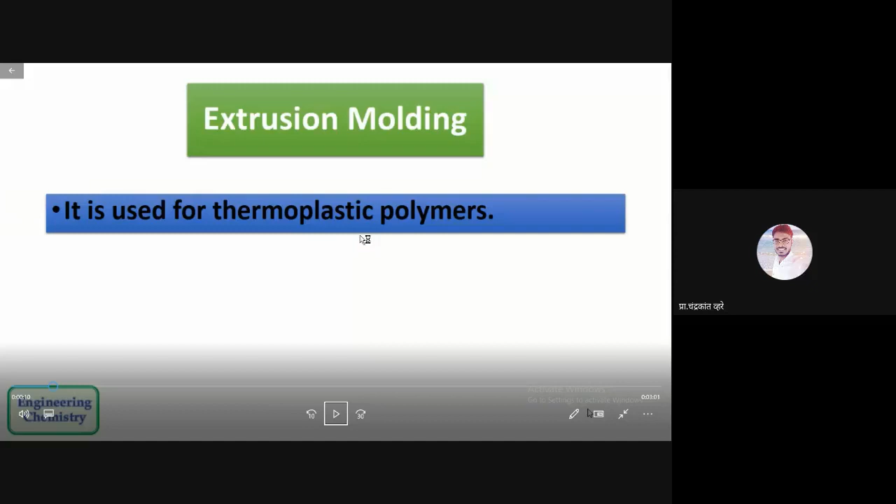Okay, so majorly it is used for thermoplastic polymers. We know there are two types of polymers: one is thermosets and the other is thermoplastic. So we are using it for thermoplastic polymers.

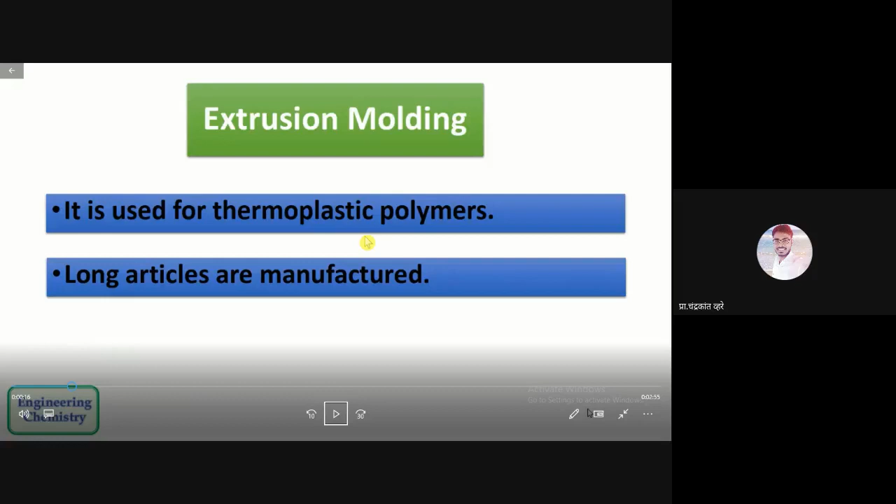Long articles are manufactured, meaning long products like long wire. Maximum time extrusion molding is used for long type products. Sometimes we use it for insulating purposes, and sometimes for long hollow pipes or other hollow products, but they must be in long size. In short size, it is not possible to manufacture.

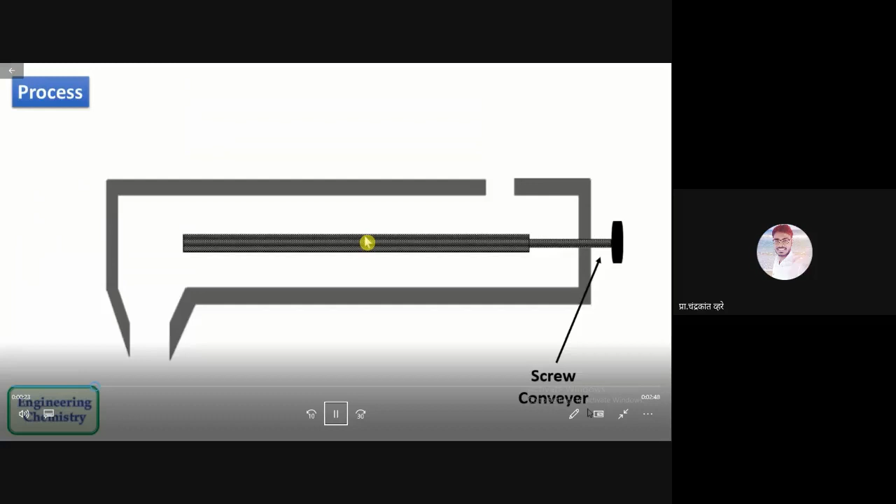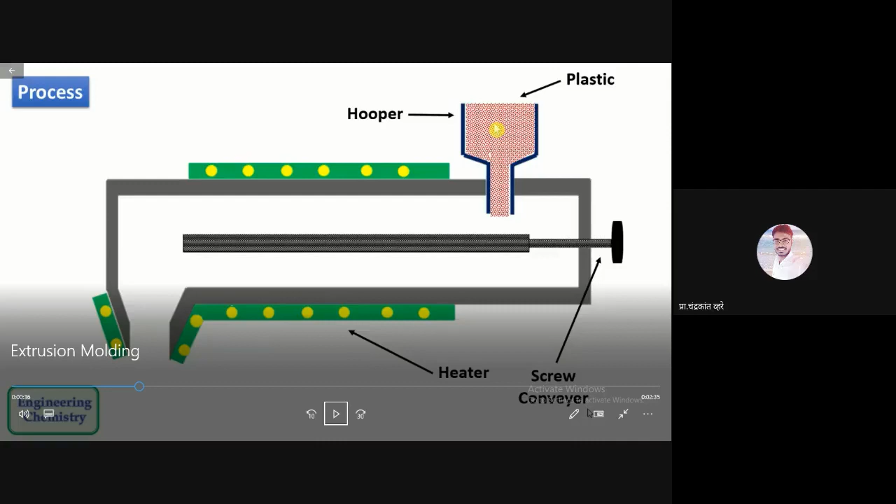So let's see the process, how it is operating. Okay, so this is hopper, at the top. This is screw. This is plastic material in the form of powder, or we can call it raw material in the form of solid. Here we have a heater for heating purposes.

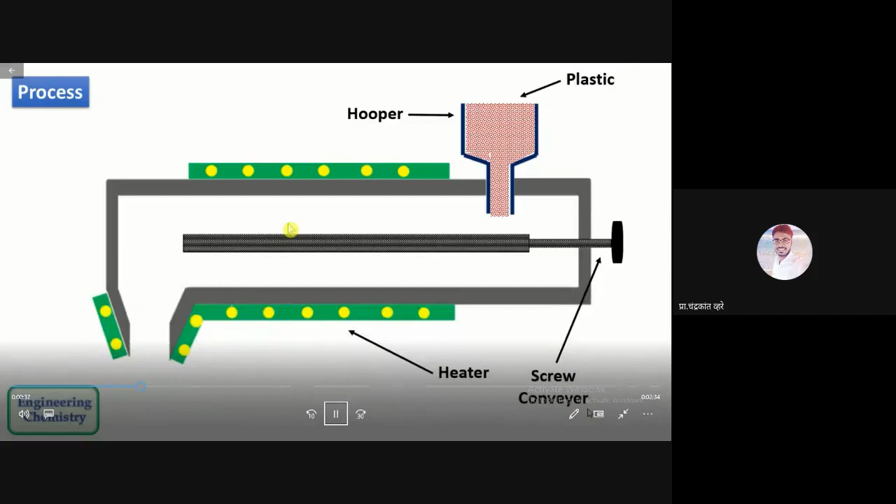Let's see the extrusion molding. Here is the screw, and due to this heater it got molten. Okay, and see the major application. Now industry is just inserting the wire from one side through the die. Here there will be a die, and on the other side you will get an insulated wire. So this is how it's operating.

Metallic wire, we are just passing through a molten plastic material. So that's it, simple. Here you will get plastic coated cables. We are inserting the metallic wire through the die into the molten plastic material, and here we are getting the plastic coated cable. So it is not difficult.

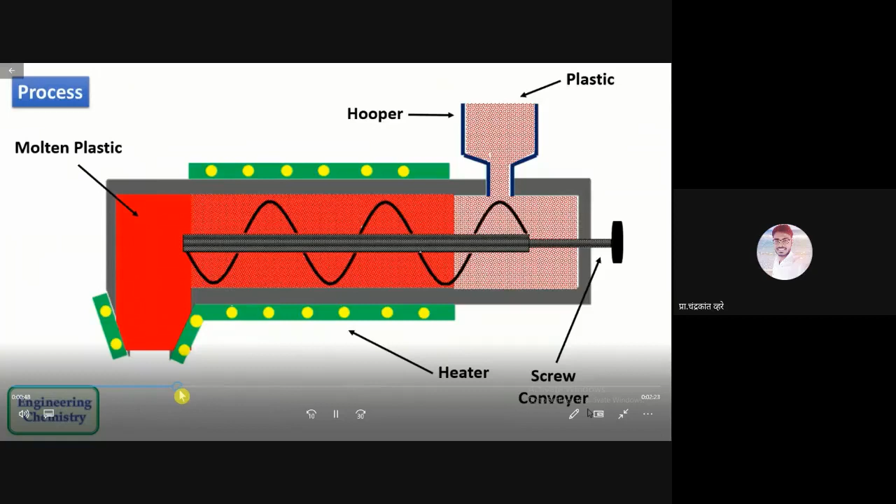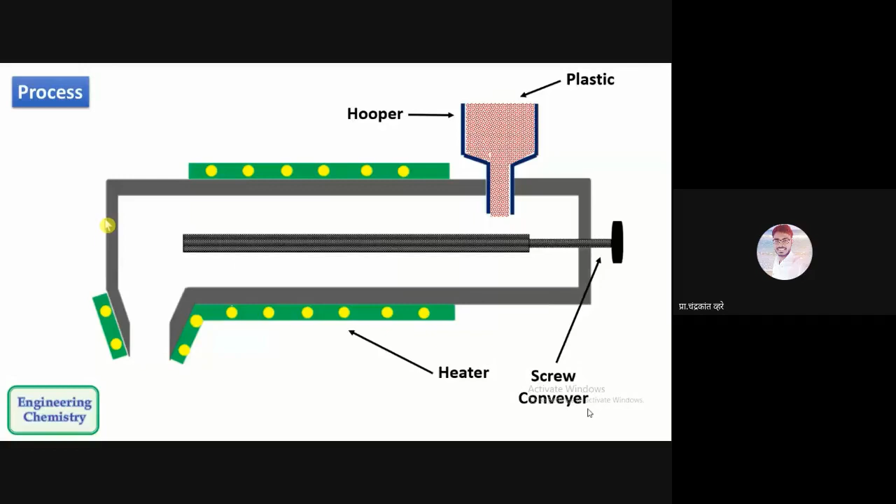Again, you just observe it again. Okay, so yeah, just see the video again. Okay, for maximum time we are using the extrusion molding process for insulation purposes.

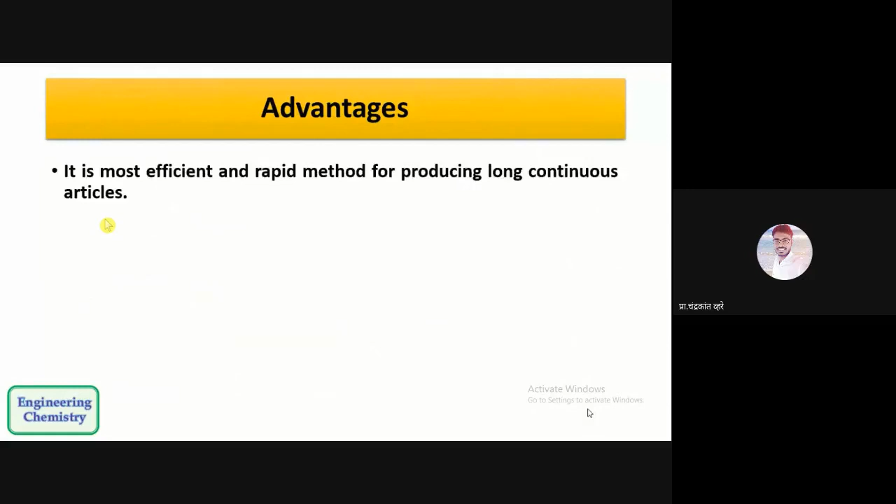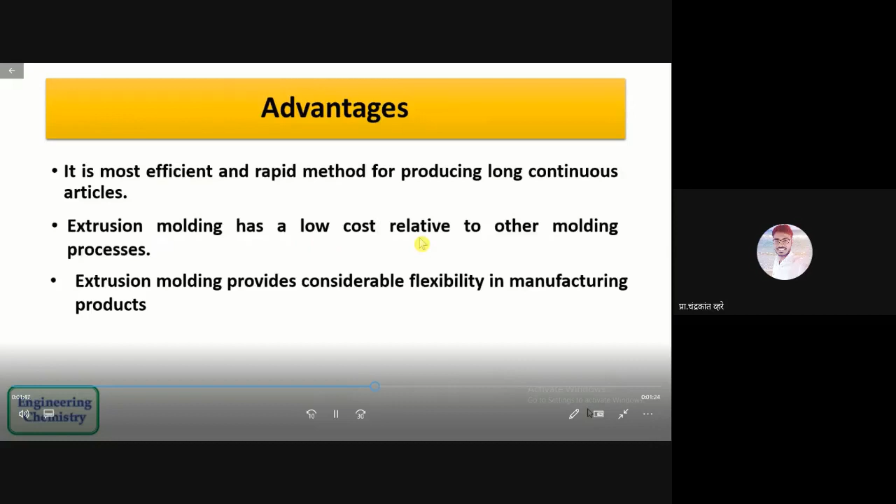Okay, so these are the advantages. It is the most efficient and rapid method for producing long continuous articles. Extrusion molding has low cost relative to other molding processes. It provides considerable flexibility in manufacturing, and the plastic remains hot when it leaves the extruder, which allows for post extrusion manipulation. Okay, so what is the meaning of post extrusion manipulation?

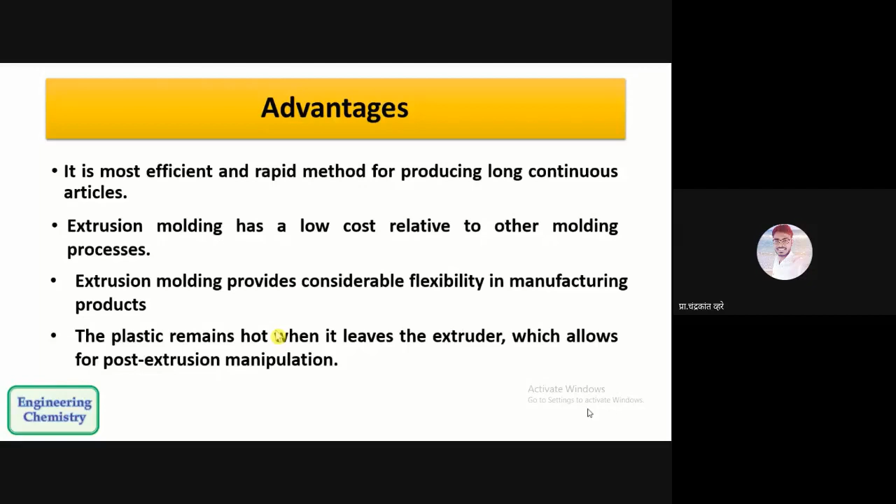We can call it as post extrusion manipulation. Okay, so these are the major advantages of extrusion molding.

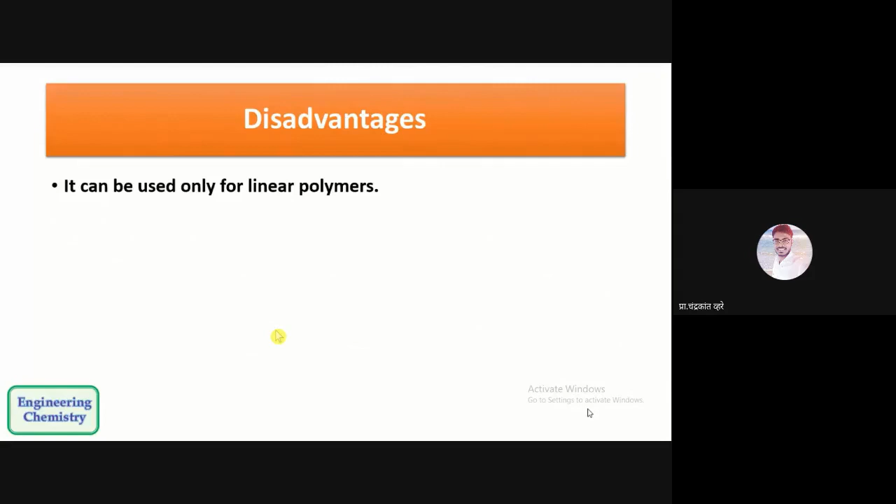Let's see the disadvantages. It can be used only for linear and long polymers - that is the only application. When the hot plastic exits the extruder, it frequently expands. Okay, there is a problem of expansion also.

Okay, the nature of the extrusion molding process places limits on the kinds of products that can be manufactured. It means only long linear products can be manufactured using extrusion. Complex parts or short parts cannot be manufactured using extrusion.

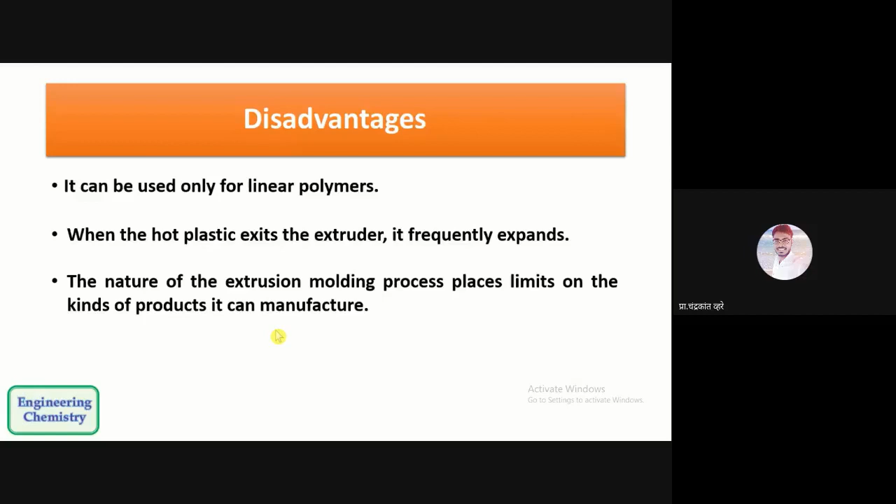In 99% of cases, we are using it just for insulation purposes. The major use is insulation. So that's it for the disadvantages of extrusion molding.

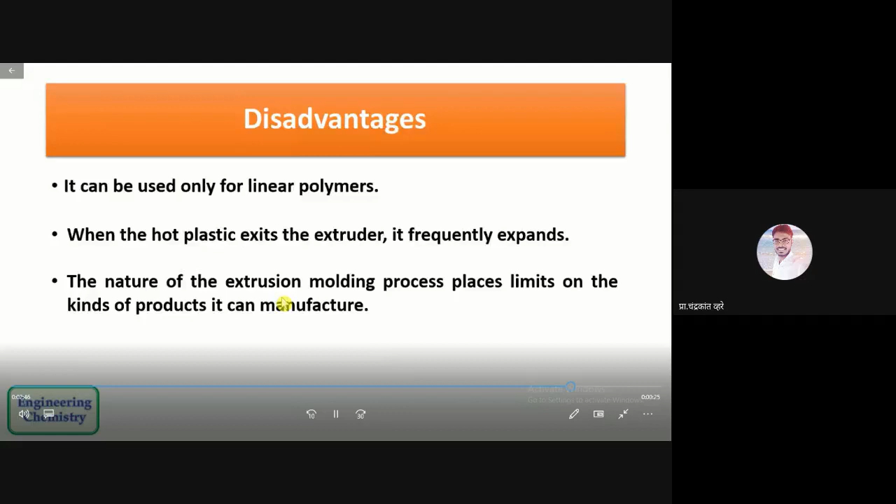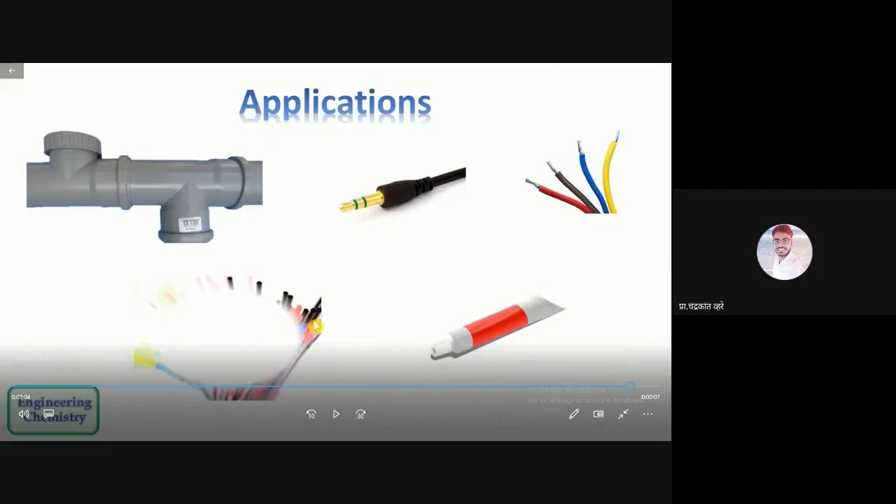Major applications: chargers pin, wire insulation, toothpaste tubes, and in summertime we use this for drinking cold drinks. I thought everyone is taking cold drinks in summer using such pipe wires. So just check, all applications are from our surrounding, everyone is using it.

So these are the applications which we can call extrusion molding.

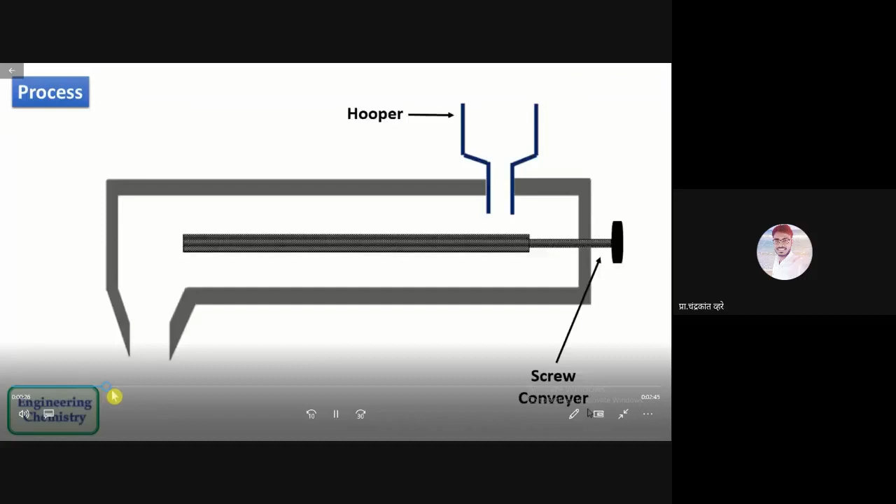Okay, so you do one thing, I thought this is a perfect diagram for you guys. Since we have discussed this, draw once again the same diagram. Take 2-3 minutes and draw this diagram, this is a very proper diagram.

In examination or any other place, just use this diagram because it is very simple. Mention all these parts. Take 2-3 minutes and draw it properly.

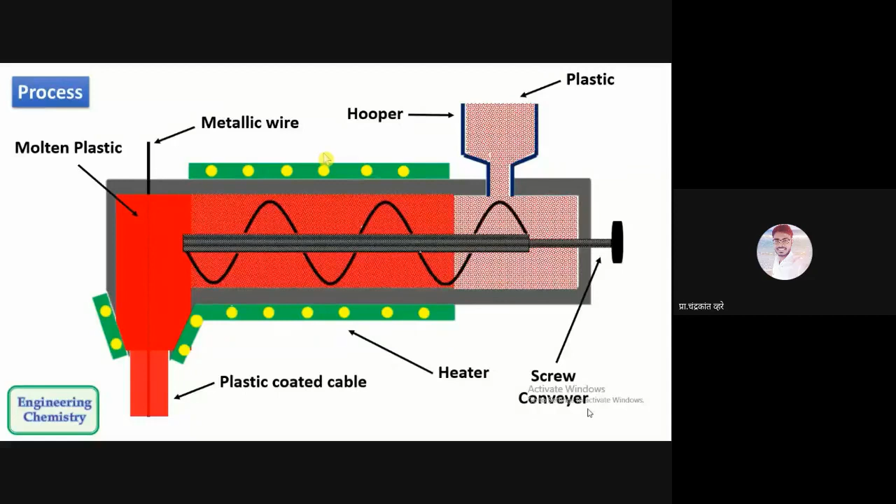Okay, go for the theoretical part. Just write it. Write the principle, I will zoom it up a bit. Now it is properly visible, so write it. If you are facing problems while writing, just zoom your screen so it will be properly visible. Okay, so write the principle.

The heading is already given: extrusion molding diagram. We have drawn two diagrams, just prefer the second diagram, and now write the principle. Write it fast.

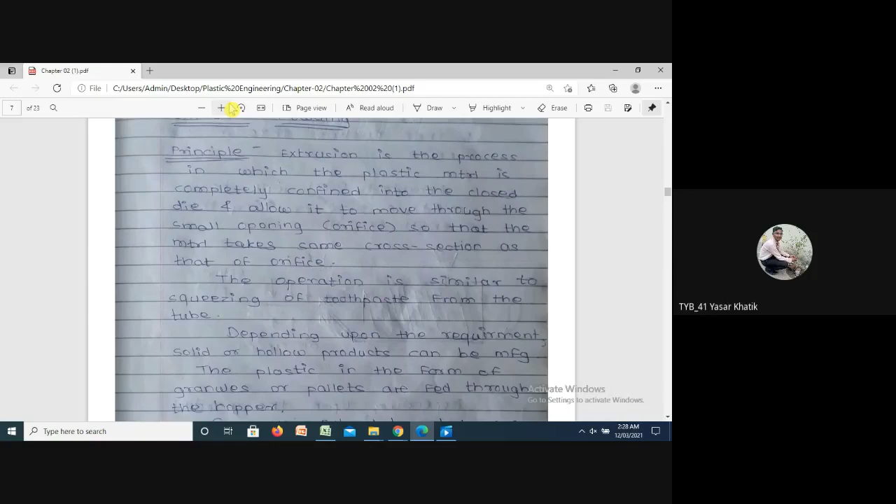Okay, go for next. Write on the right and below: generally, extruded products are used as a raw material for other finished products. Write it fast.

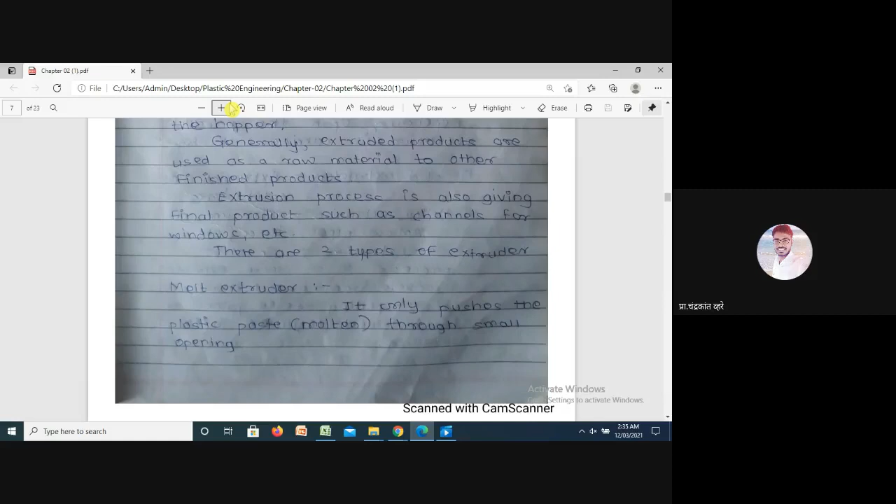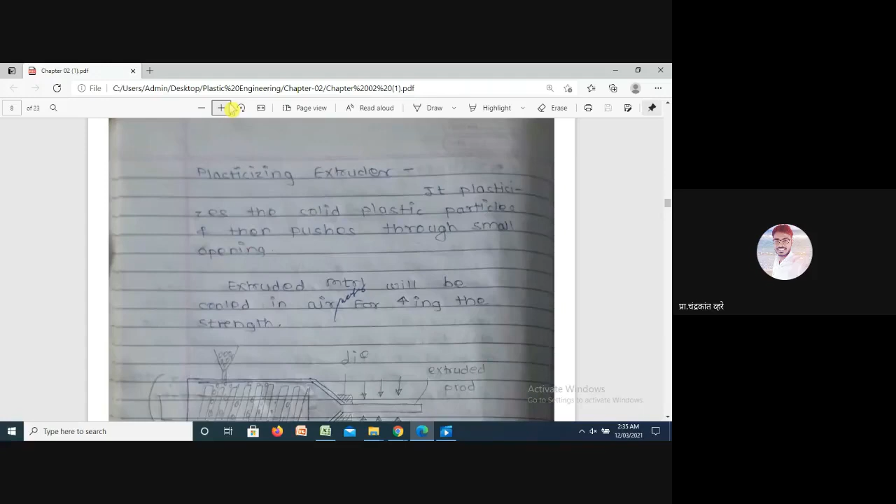Right after this, we'll go for the next part. This is all about extrusion molding, okay, it is not difficult, so write it properly.

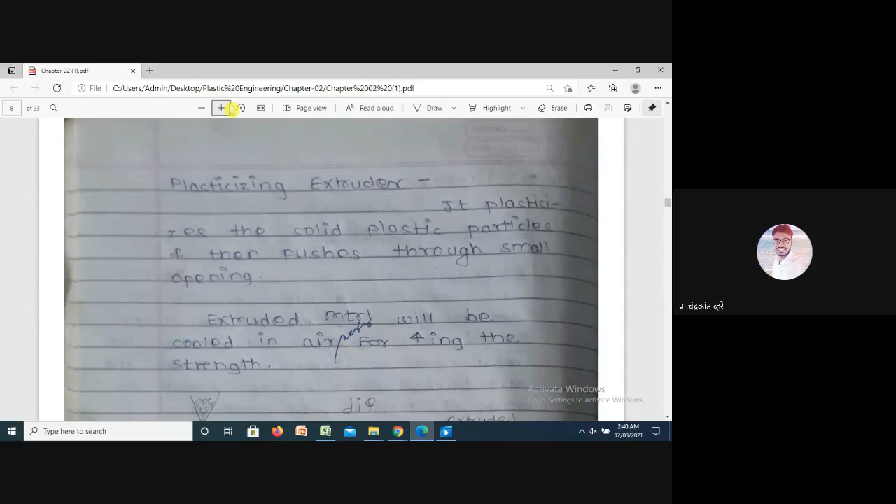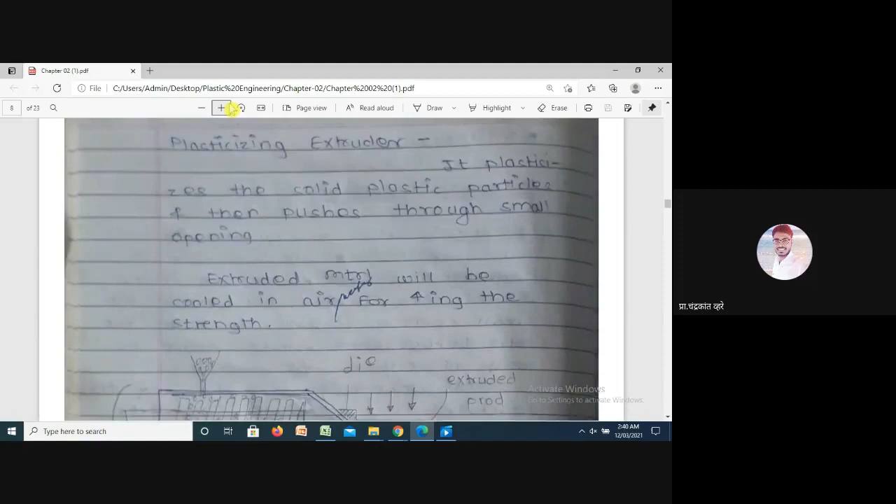Okay, so that's it for extrusion. Just write the advantages and disadvantages only, this is not required, so just write down the advantages and disadvantages.

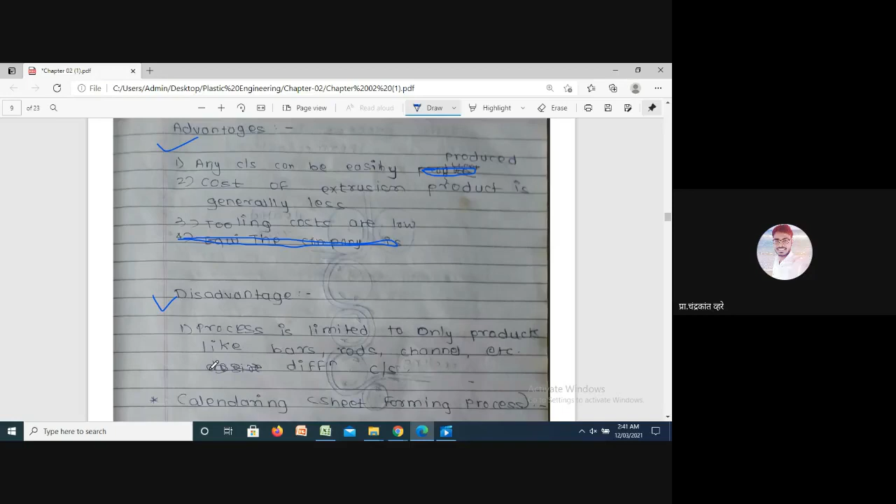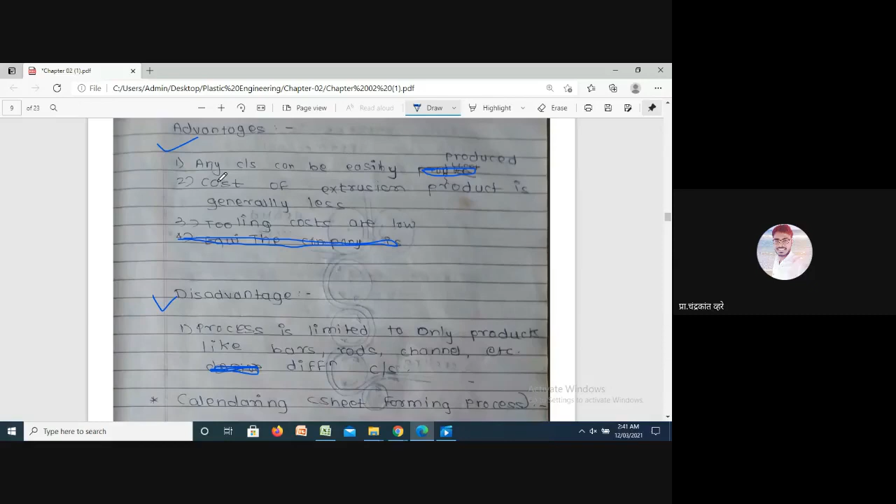Now write it. Any c/s can be easily produced. Second, cost of extrusion product is generally less. Third, tooling costs are low as compared with injection molding. What are the disadvantages? The process is limited to only products like bars, rods, channels, etc.

This is also not okay, so write it.

In the next lecture, we will start the calendaring sheet forming process, how plastic sheets are manufactured in industry. This process will start in the next lecture, we call it calendaring. Just understand the process practically; theoretically it is not very important, but understand it practically.